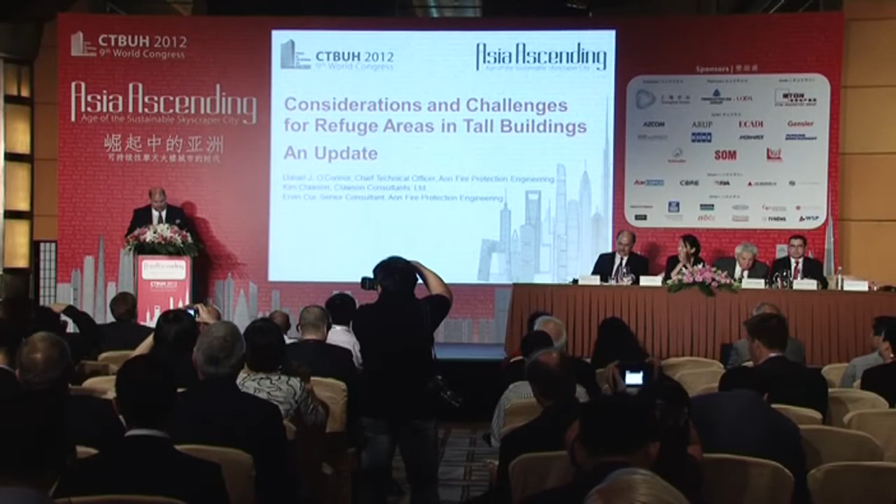I think this week, particularly the last 2 days, we heard a lot from the developers, and from finance and investors for buildings, particularly today. As I go through my presentation about refuge areas, think about the impact of refuge areas, particularly refuge floors, on the financial model for these buildings and their sustainability aspects.

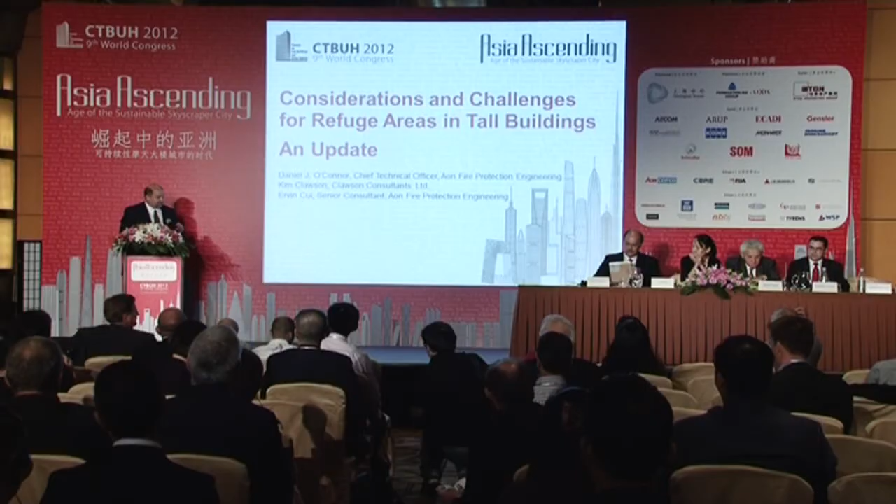What I want to talk about today is not so much my opinion, but a collective dialogue we've been having within the CTBUH Fire Safety Working Group. Just to give a little background, the Fire Safety Working Group has many very experienced engineers who have worked on tall buildings around the world in Asia, Europe, and the Middle East, participating in our working group.

One individual was particularly interested in us having more critical thinking about how we use refuge floors and refuge areas in buildings. He brought this to our working group's attention, and we started a dialogue that has continued for about the last year and a half. We've been preparing this paper. In fact, this presentation was presented at the CTBUH conference in Korea, but today is a bit of an update with a couple additional things we're going to talk about.

The important thing is we thought we needed to slow down and think more deeply about how refuge floors are used, what their value is, and what they're trying to do. So I'm here today to bring forth a lot of what our dialogue has been about, and maybe give you a better understanding of the issues, concerns, and reasons to consider or not consider implementing refuge areas, particularly refuge floors, in buildings.

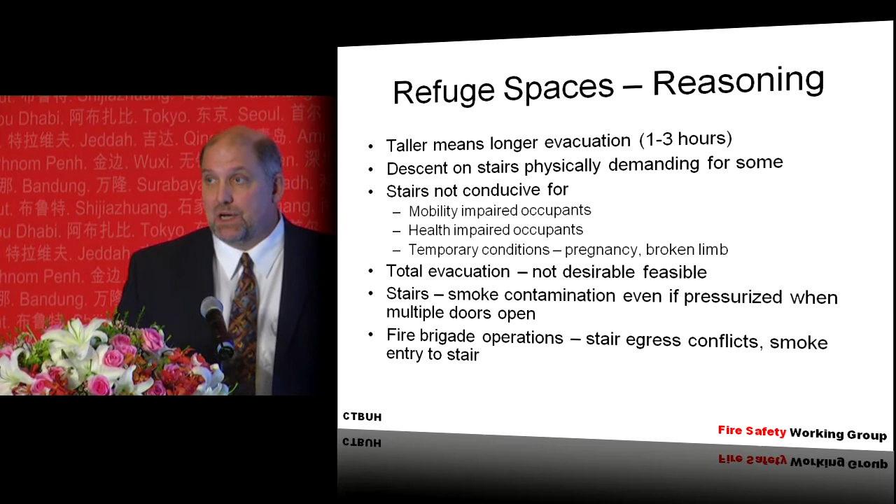Also, with super tall buildings, for a lot of standard emergency events, total evacuation is really not desirable or feasible. If you have a building with 10, 15, 20,000 people in a super tall building, is it really something you want to do—a full evacuation of that many folks? It's been done, but is it something you want to do on a regular basis? That's one reason people have suggested for having refuge spaces.

Let's talk about stairways. We know from the literature that smoke contamination can be a problem if pressurized stairways have multiple doors open. If we have a large evacuation, or for some reason many doors are open on a stairway, it's going to be difficult to maintain those evacuation routes in a smoke-free condition. Hence, maybe you want to put folks into a refuge area.

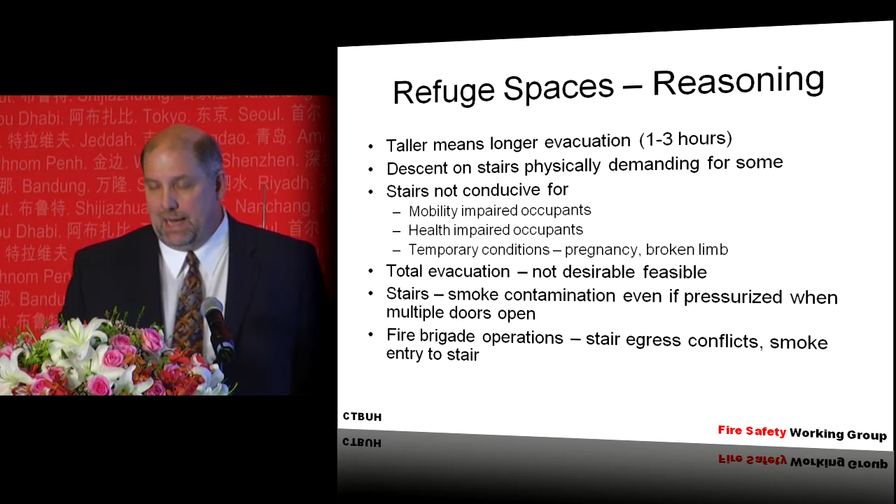And of course, there can be a reason for moving folks into a refuge floor of a building to avoid conflicts with fire brigade operations. So this is some of the background in the literature—the reasons people have decided to implement refuge areas and refuge floors in buildings.

But when we started to look at this and break it down, we saw there were really two basic methodologies of providing refuge areas in buildings, and I'm going to talk about both today. The first approach is what we call the dispersed approach.

The dispersed approach is the one used in North America—those of you who've been in North American cities, Canada—with some implementation of it in Europe and the Middle East too. The options available in the dispersed approach are that if I have a fully sprinklered building, each and every floor can be considered a refuge area. That's a fundamental tenet of the requirements for sprinklered buildings in US codes.

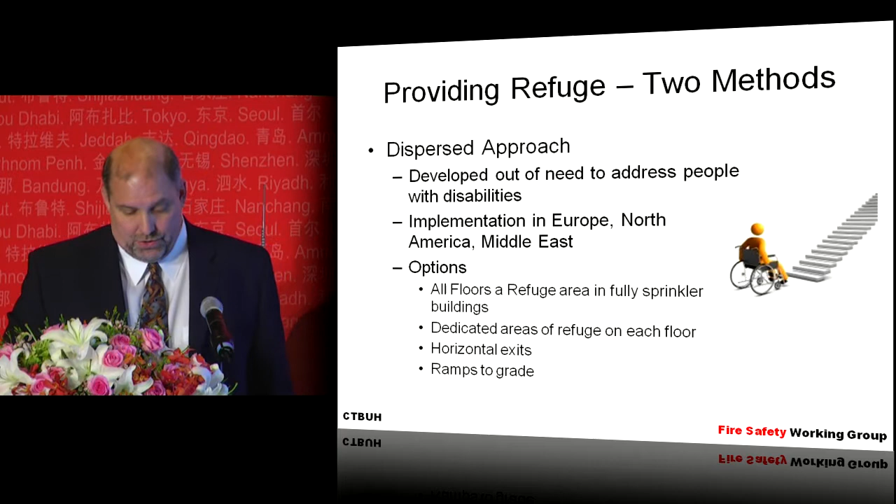There might be other ways to do this, such as creating dedicated areas of refuge on each floor in a building. For those staying in the Jinmao Tower, on the hotel floors with that beautiful atrium space, I found out speaking with people this week that the refuge areas actually use a dispersed approach, with a protected elevator lobby on each hotel floor rather than one large refuge floor. However, this building does have refuge floors too in the office areas.

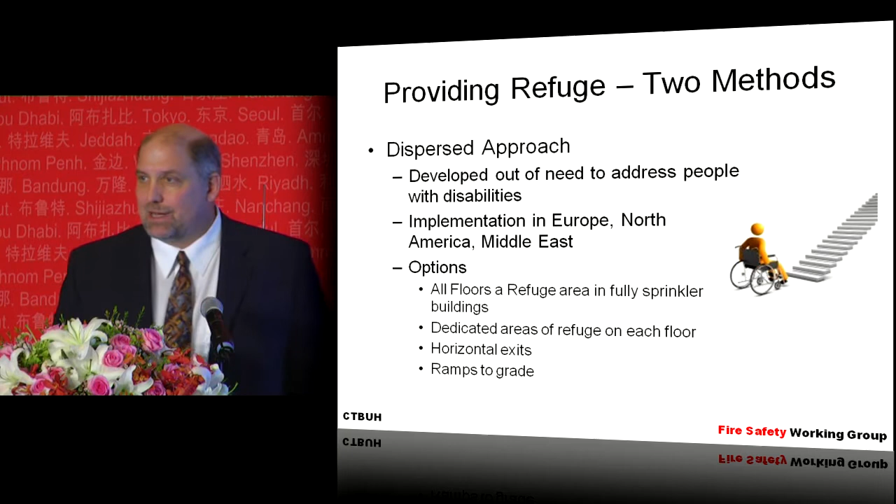Horizontal exits - I'll explain more about this concept if you're not familiar with it. And then, of course, ramps to grade. From a super tall building, we're not going to build ramps down to grade, so that's an option available for low rise buildings.

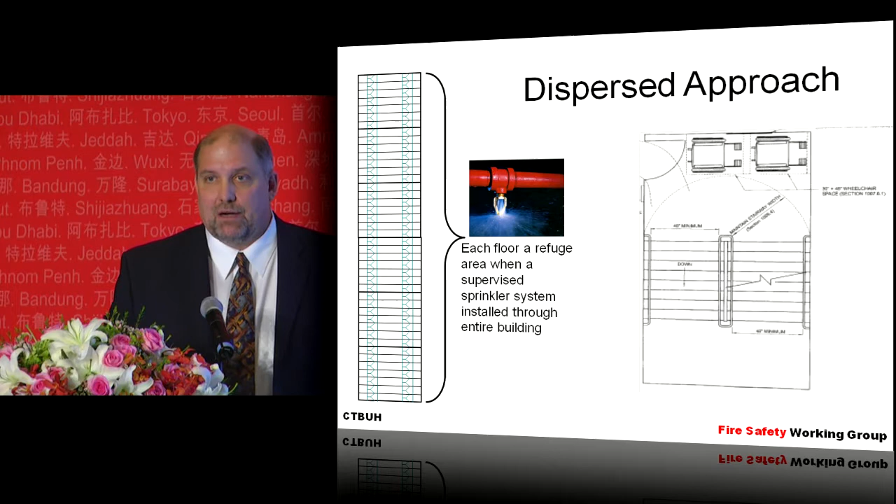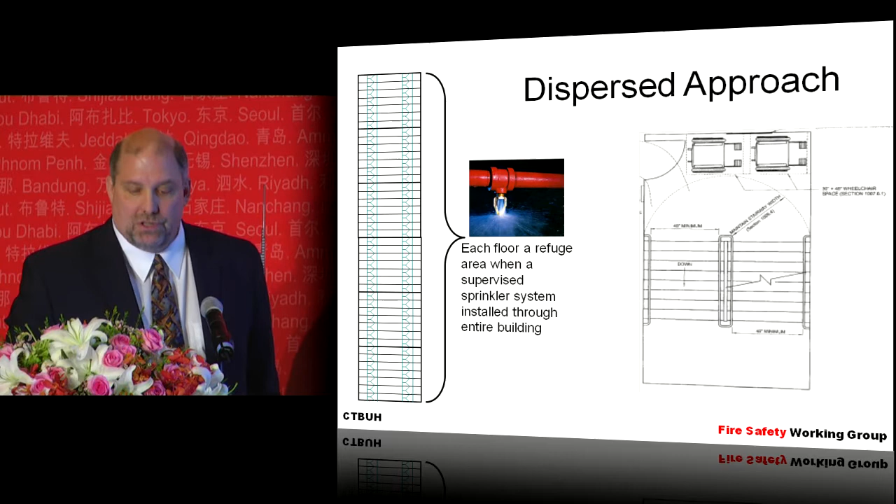But here's a fundamental look at what the dispersed approach is about, trying to graphically represent that if we have sprinkler protection to deal with the fire at the point where it occurs and put it out immediately, then we need not be so concerned about moving people to another refuge floor location. So all the floors in the building can act as a refuge floor.

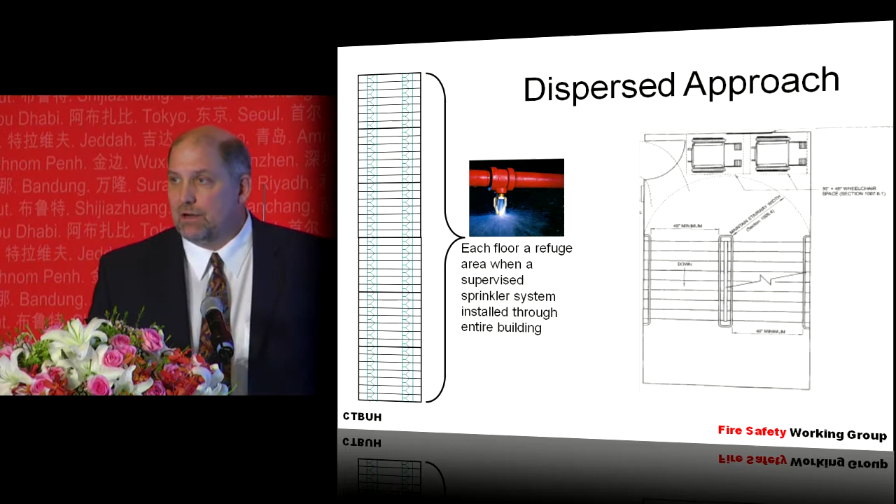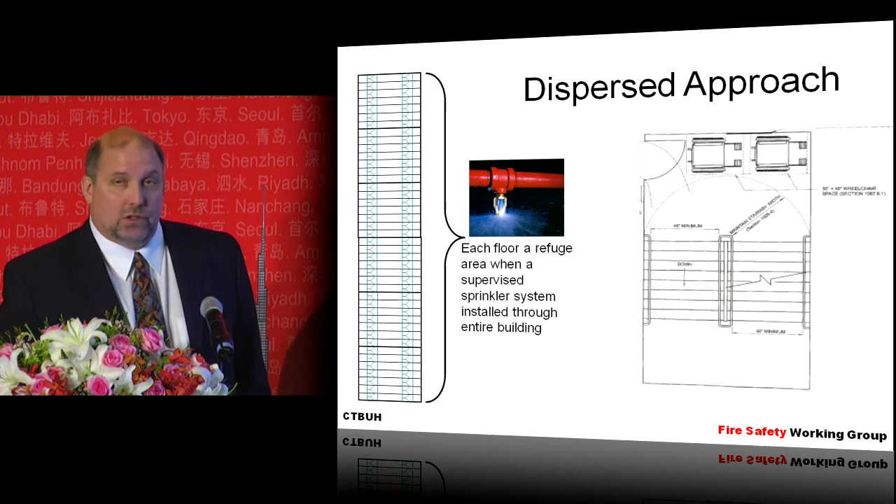We can go a little further and say, for dealing with handicapped issues, we have the potential to put wheelchair spaces in the stairways too, so that folks heading towards an exit can find refuge in the stairway, even in a sprinklered building. I'm from Chicago, and in sprinklered buildings there, every stairway is required to have at least one wheelchair space. That's the dispersed approach.

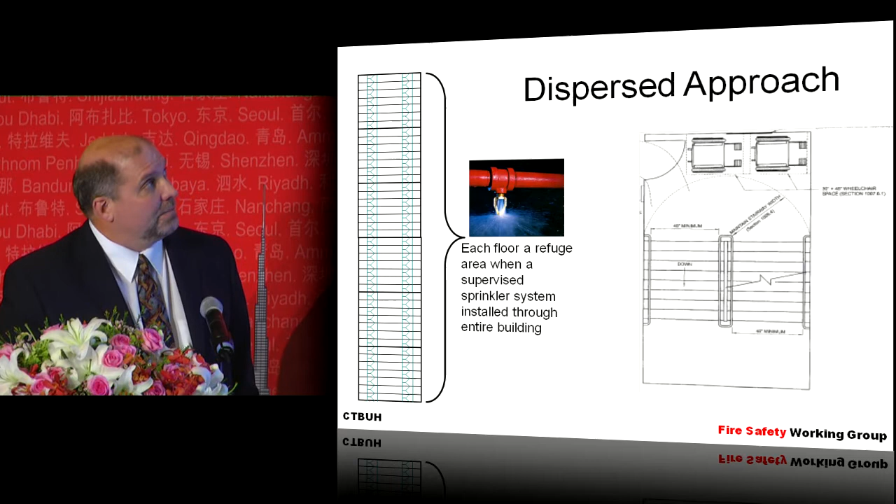Another way of providing refuge in buildings is the concept of horizontal exits. This basically says that if we provide a fire separation in the building - a rated fire separation, probably a 2-hour separation that extends from exterior wall to exterior wall - people can leave from the fire side to the non-fire side and be in an area of refuge. That's a concept quite often used in healthcare and hospital facilities.

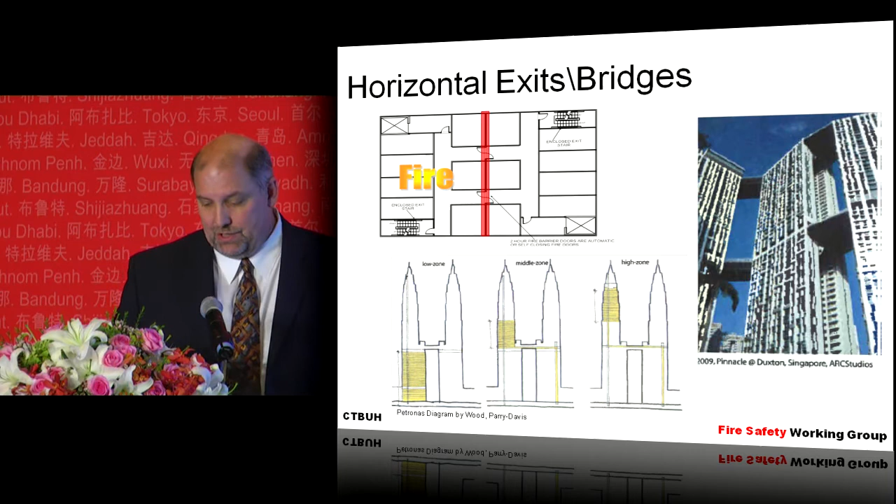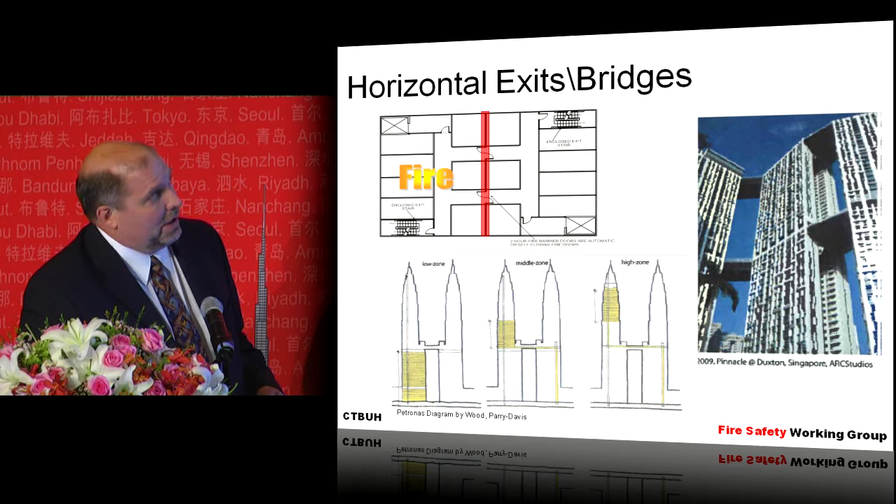But also, as Anthony Wood pointed out in his opening comments today, bridges such as those at the Petronas Towers can serve a valuable method of exiting the building - coming down, crossing over into another building that's not at risk. So bridges can be a valuable way to achieve horizontal exits, either inside a building or moving from structure to structure.

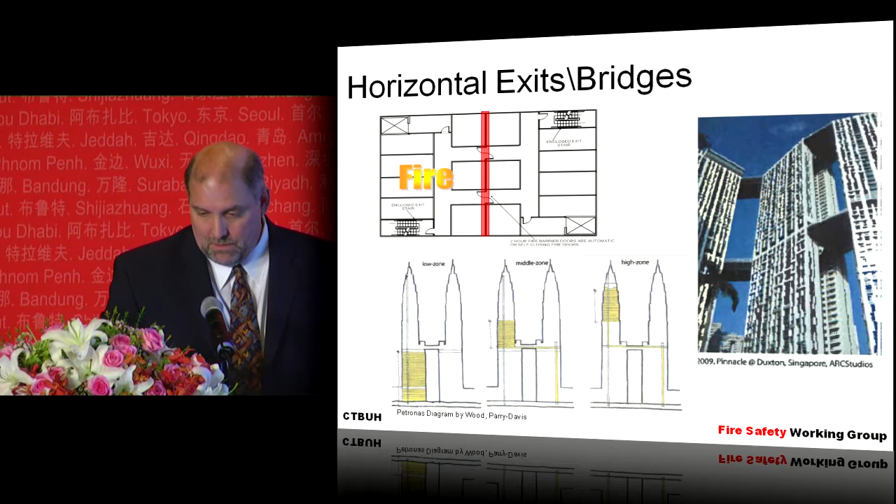Continuing our discussion about the two methods of providing refuge, the second approach is the consolidated approach, which is what we find here in Asia being used regularly. From what we can find in the literature, it seems to have been an outcome of several Asian fires in the 1990s, including Hong Kong's Garland building. If you look back at that fire, the building didn't even really qualify as a high-rise - it was only about 7 stories. The fire started in the basement, but it was a bad fire. Out of that discussion came the need and desire to create refuge floors in buildings.

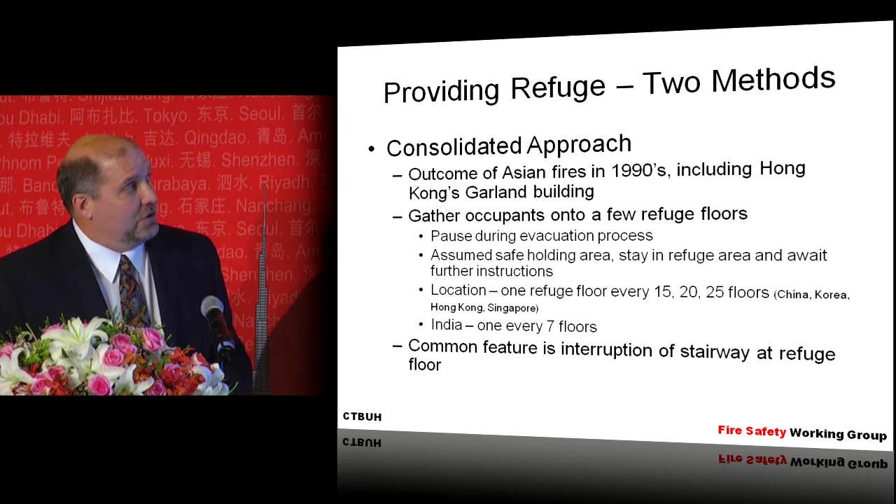So using this consolidated approach, we move people to one central floor area or one of several floors located in the building, for a couple of reasons. The literature indicates these are good places to pause during evacuation, perhaps if you're tiring from moving vertically through the building. It's also assumed these are safe holding areas where you can stay for a long period and wait for further instructions. What we see in Asia requirements is that refuge areas are required maybe every 15, 20, 25 floors - it varies, I'll talk more about that in a few slides. In India, the requirement for refuge space is one every 7 floors.

Also, one thing we see in the application of refuge floors in buildings is that a common feature is interruption of the stairway at the refuge floor. And in fact, that's a very common architectural feature that is used now.

In the Jinmao building, if you're in the hotel parts of the building, so in the upper levels, we have application of the dispersed approach, but in the office portion they actually use the consolidated approach because they have 2 or 3 levels that are refuge floors in the building. As you come down the stair, you can leave the stair and go into a corridor that then connects into a room. I was on the 15th floor, they had 2 of these rooms.

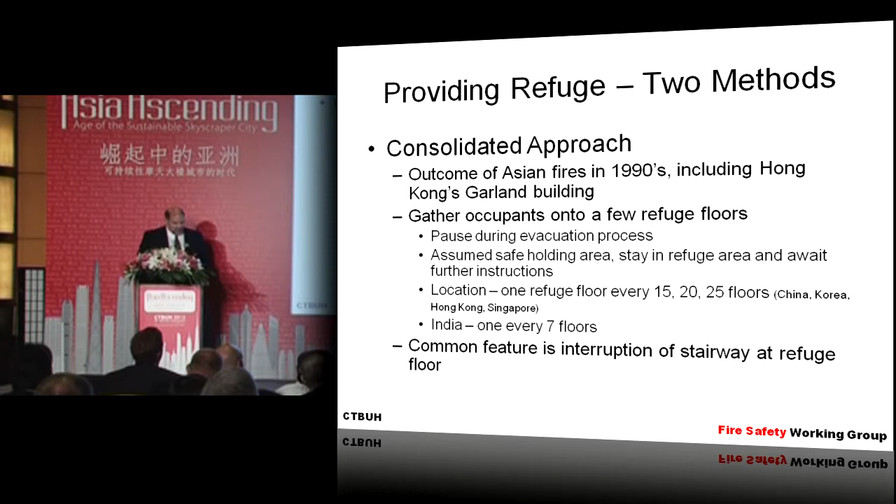So let's stop and slow down and take a look at what the refuge floor concept is about. Basically what we're saying is we're going to dedicate one floor out of our tall building to refuge for occupants. So what that allows for is that we can have this dedicated area, and we might say, let's move people down to this refuge floor.

So what we effectively do is we take an area that's empty and we move a large population of people into this floor, either to await further instructions or maybe because they decided they could go no further in the building because of the type of event that happened.

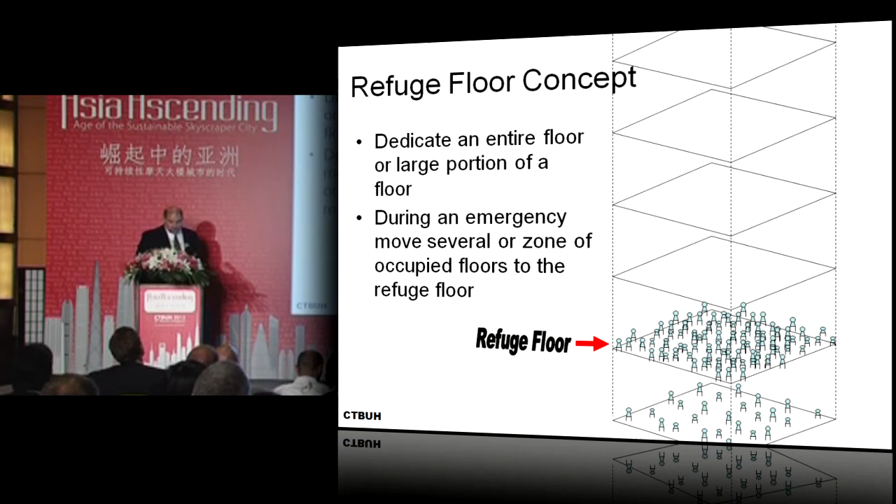So there's a number of issues when we do this. When we move all these people to a floor, there's a number of what we believe are serious design issues that include: are toilets needed? Do we need drinking water on these floors? It depends how long these people are going to be there, what the nature of the event in the building is. Do we need to provide seating facilities, or is it just going to be standing room?

Certainly, an important consideration can be, what is the emergency power for the lighting and the floor amenities provided in this refuge floor area? Also, there can be issues related to how well this floor area is protected against increasing fire spread in the building, whether that be flames or smoke.

And then once we move everybody from all these floors, who were probably on floors that had an HVAC load as would be needed for the population, now we have all this large potential population on the refuge floor. What does that HVAC design need to be to accommodate them?

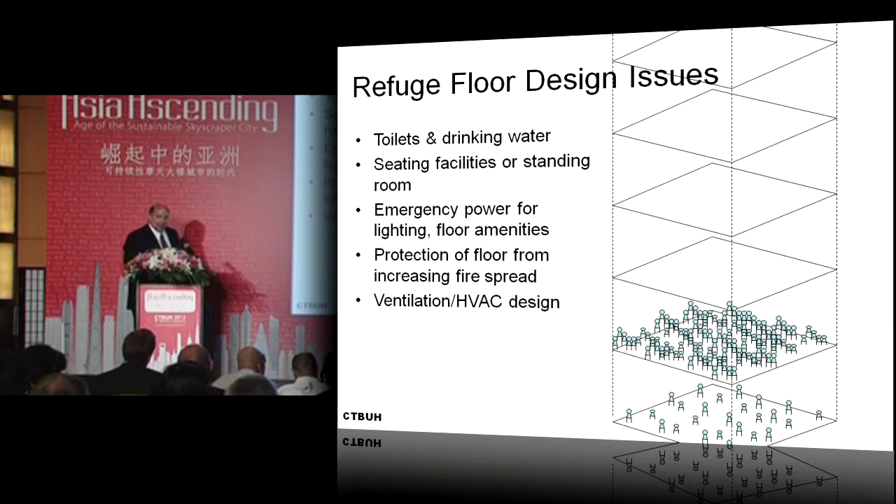Then there might be some safety issues we see related to application of refuge floors. Looking back at the literature by a number of Asian authors, we see a list here of Kwok, Cheng, and Chow and Chow, and you can find these references in our paper. They have all pointed to the fact that when refuge areas are done, and I think Hong Kong likes to use the concept of having two opposite walls open air, they pointed to the issues of potential for smoke contamination of those open air areas from fire and smoke that might be venting out the building.

Again, there's also HVAC system function considerations. Is there going to be adequate fresh air for the population there? And are we going to pressurize this area to try to keep the contaminating smoke out of this area?

One of the things I have a particular interest in is human behavior in fires. One thing I've become a little concerned about is overcrowding, the potential overcrowding issue. If we have this large crowd of people in this area, remember, this building may have been designed with only 2 or 3 stairs to serve the upper floors. Now we've created a much larger population, a factor of 4, 5, 6 normal to this floor plate area, and we still have maybe only the same number of stairs.

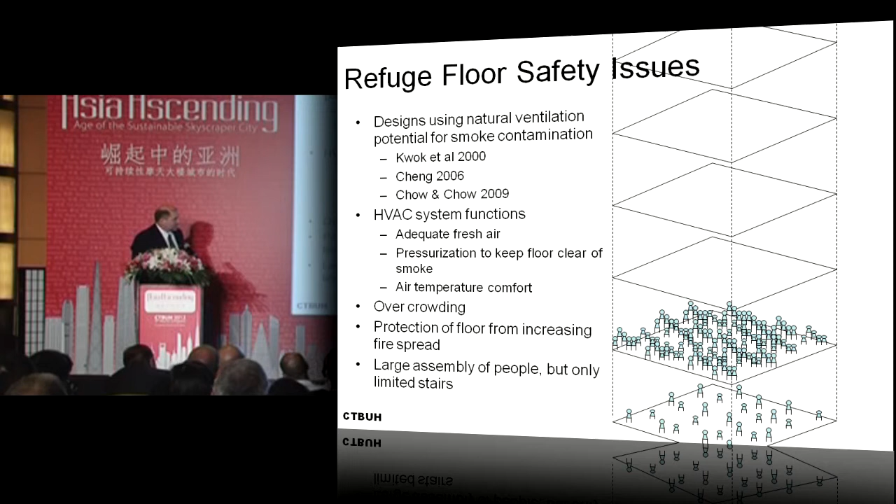I've already mentioned the issue of protection of the floor from increasing fire spread from floors below, perhaps, and we've talked about the large assembly of people.

So one of the big things we see, and again this goes back to the financial models for tall buildings, is what are the costs associated with these refuge floors. There's a number of different things that can impact the financial model for the building, including the additional construction time to add these floors, and maybe cleaning and HVAC costs for what's a normally empty space.

But then we see that there's definitely maybe a loss of efficiency and an impact on the potential leasing plan and leasing model for the building. There might be definite issues with usability when you have to interrupt a tenant who wants perhaps 4, 5, 6 floors in the building, and then you have to tell them we have to interrupt your operation with the refuge floor.

Certainly there might be property tax issues. Are these floors and zoning potential issues related to this? Are we losing zoning potential by having to add these additional floors in? And what are the property tax issues related to having an empty floor that sits there dedicated for the use of refuge? So these are questions that go to the financial model of tall buildings and also to the sustainability aspects of tall buildings.

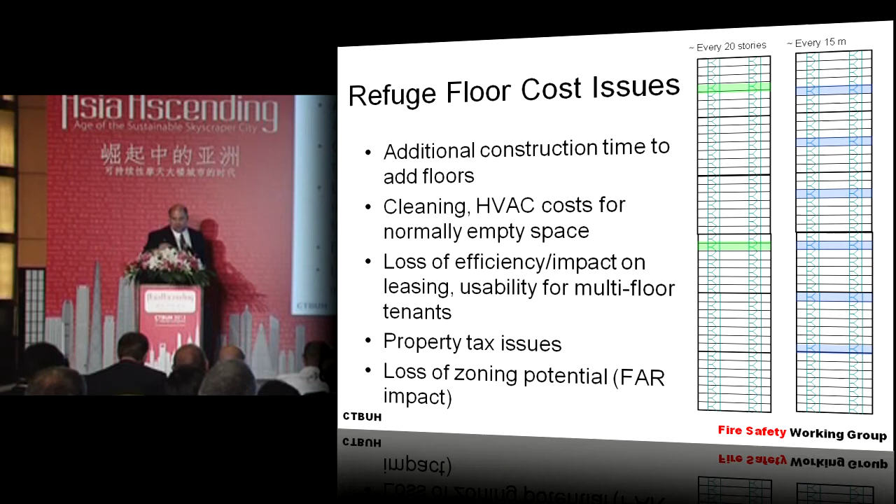You can see here, looking at a similar building, that maybe if you're providing refuge every 20 stories, you're taking up a floor here and then a floor here. But if you go as in India, which requires every 15 meters, then you would have refuge areas in this fashion. In either case, you might be taking quite a bit of real estate up, and a loss of revenue.

So one of the things I wanted to point out today is that there are a number of different evacuation scenarios. You can take any given tall building and probably develop a dozen different evacuation scenarios. But what I wanted to show you here today is just, for example, to try to understand what some of the issues might be with refuge floors.

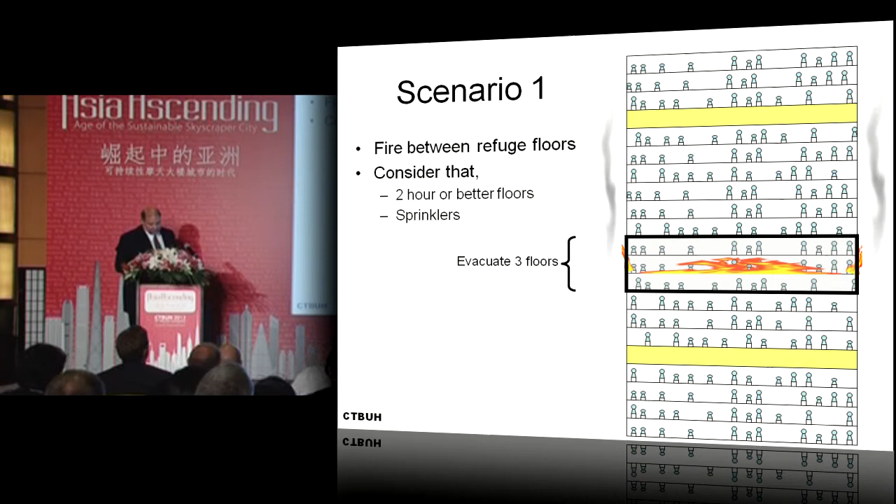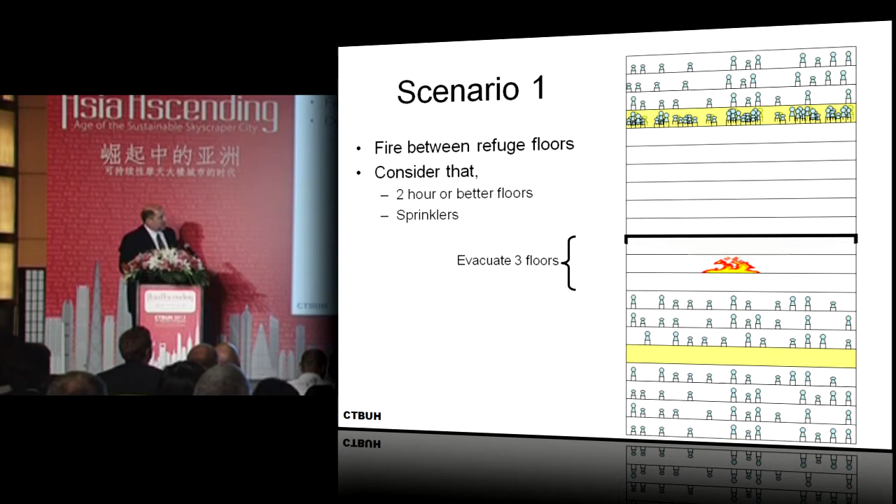So we have a fire that occurs in one area of the floor. The typical response might be to order an evacuation of the floor above, the floor below, and the fire floor, and let those people evacuate through the stairs out of the building while everybody else remains in the building, or do we? Maybe this fire continues to grow in size, and perhaps then there's a need to move people into a refuge floor.

Now if we really think about what we do to design our tall buildings, we're typically going to have 2-hour or better fire-resistant floors. We're going to spend a lot of time and money to fire stop any of the mechanicals and protect the vertical shafts that go through these floors. And we're going to have sprinklers in this building too.

So is it even really necessary, if we've moved the people out of the immediate zone here, and with the 2-hour floors, the fire stopping, and the sprinklers in place, is it even necessary to move these people up to a refuge floor? Perhaps not. I would suggest to you that those folks could have stayed in place on their floors where they were. So that's one scenario.

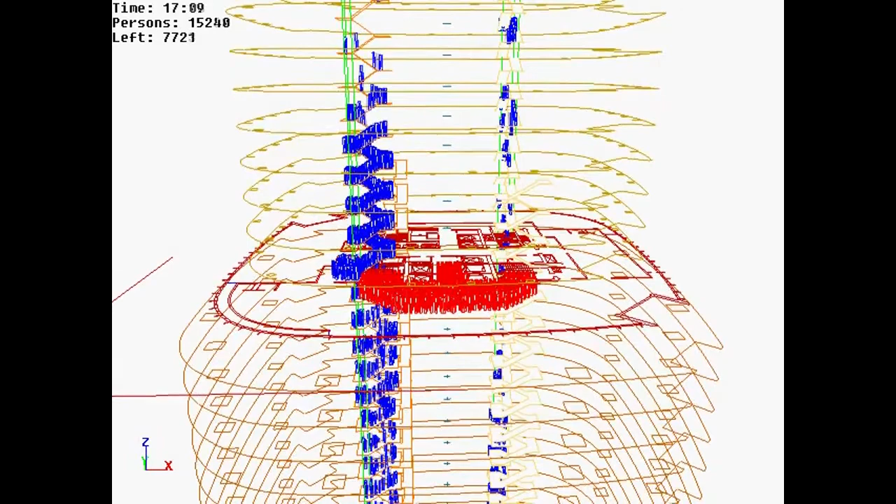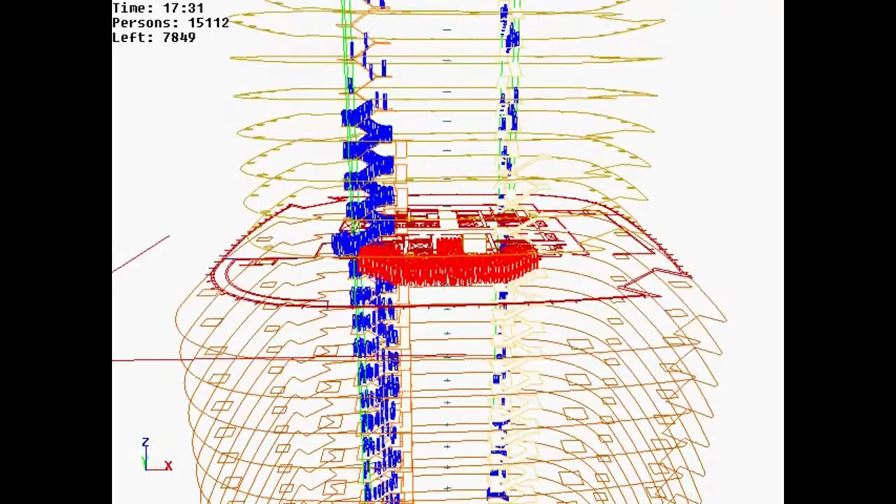So what this shows you here is an issue that we see could be problematic. This is an evacuation model where people are filtering down the stairs and coming into a large refuge area floor, and they're trying to use the elevators on this floor. People come out of the stair, they come into the refuge area, and then they go back into the stair. You can see a potential crowding condition here, with elevators rising up and down at times, but potential crowding conditions can develop as people wait for the elevator here.

We don't really know a lot about how people might use these floors, so this is just one illustration of what could happen. Will this happen in this manner? I can't say that it will, but it's something we see in the models that can be an issue depending on how the floors are arranged, how they're being used, and what their purpose is.

Maybe it would have been better to not have a refuge floor here and let everybody stay in the protected stairway and continue to exit through the building, or maybe stay on the floor where they were.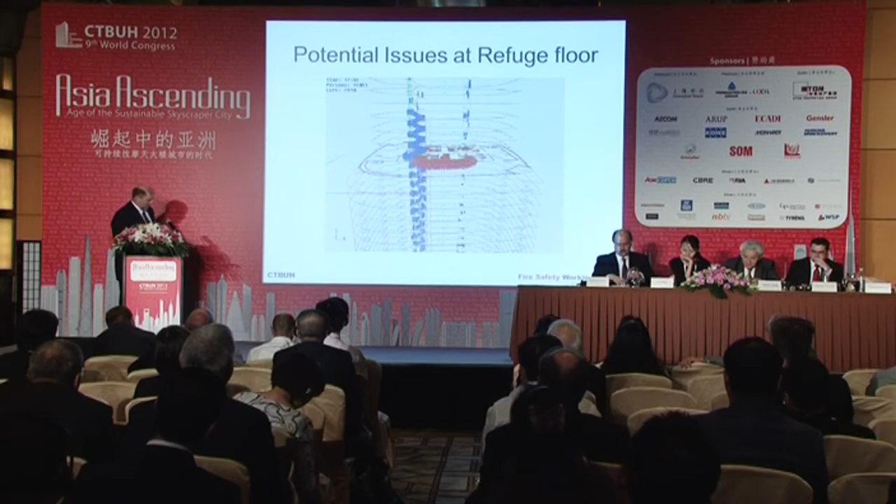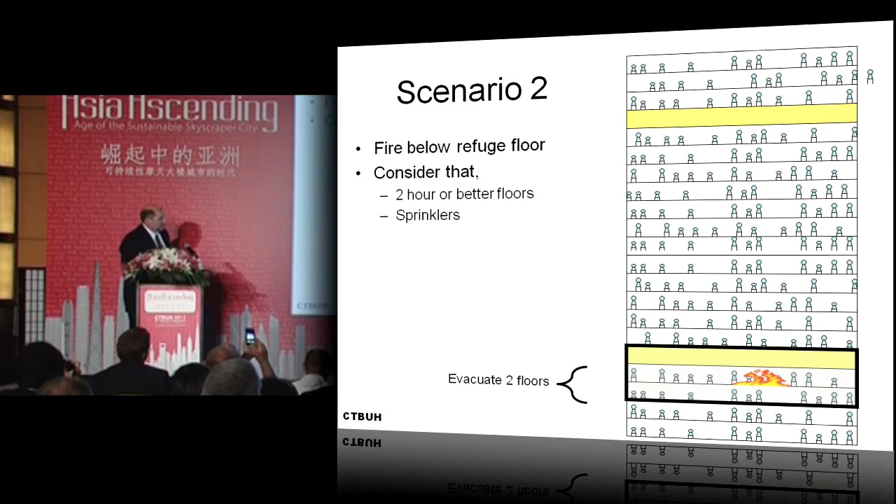Here's a second scenario. This is where we have a fire located on the floor immediately below a refuge floor in the building. In this case, we would say let's evacuate two floors because our refuge floor is empty already.

But a concern I have is how are all these people being trained and thinking in the evacuation process? What do they need to do and what are they being told to do? Are they being told, we have an emergency event, please go to the refuge floor?

After we evacuate the two near floors and we have our zone, is it really fair to say let's move you down right into the refuge floor, even though it is supposedly a protected space? Do we need to move those folks in the refuge floor right above the fire? My suggestion would be that it would have been better to have just left this population on the floors where they were in the building.

So the question is, how are you using these refuge floors? What are people's perceptions about these refuge floors? How will they really use them? My understanding from talking to a number of people here in a number of buildings in Asia is that people kind of ignore the refuge floors and don't really use them. That is feedback I am getting from people on our fire safety working group.

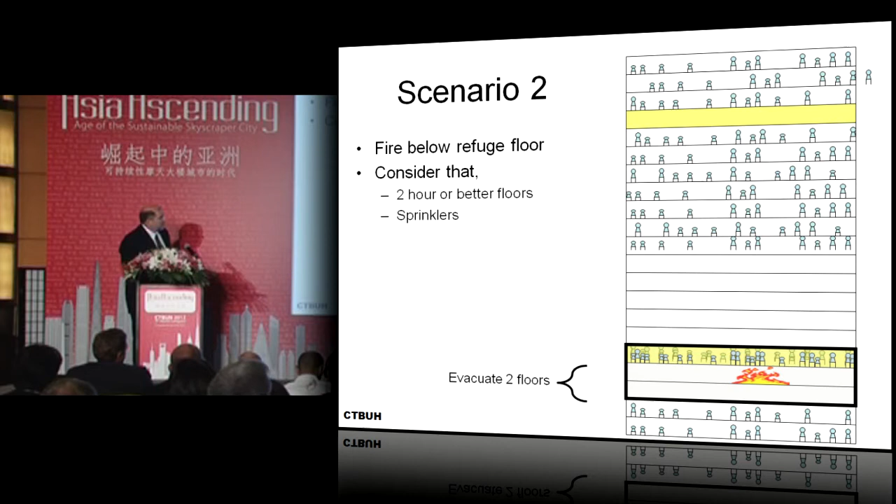One of the things I mentioned earlier was the various codes. We see there's a wide variation among the various codes we're looking at, and we have collected the requirements from codes in a number of various countries. Here's just, for example, a listing of a few.

In Korea, when are the refuge floors required? Refuge floors are required when you hit 50 floors. In Hong Kong, their rules say 25 stories in height. In Saudi Arabia, 30 stories. And in India, it starts when the building hits 24 meters in height. So that's when they're required.

Then there's issues related to differences in implementation. There's a lot of variations we see in Asia with how much floor area you really have to use and make available in this refuge floor concept. In Hong Kong, we see that they like to have 50% of the total gross floor area. In Korea, they like to get you as near as possible to 100% of the floor area, although they do have room allowance for mechanical areas.

In India, they use a different approach of calculating, either having 15 square meters of area on every floor or calculating it based on population. And in Saudi Arabia, we see that they like to have dedicated floor areas, the entire floor, every 20 floors in the building.

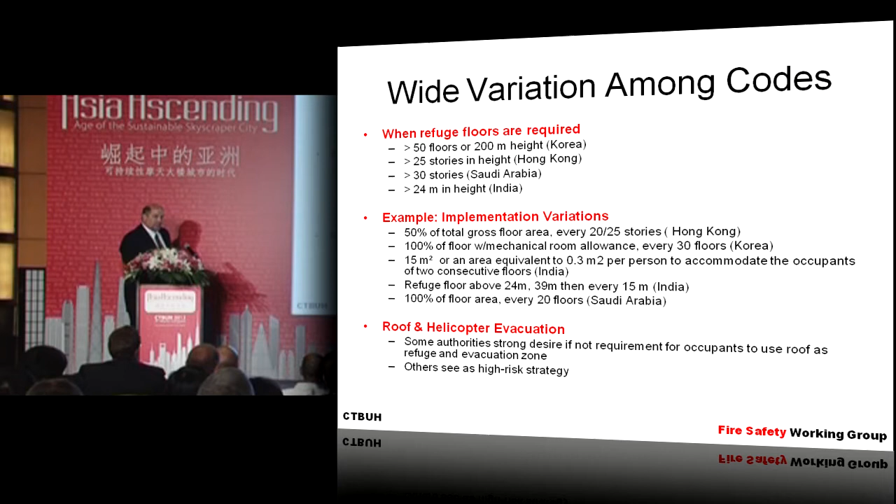So what else do we want to talk about? Roofs too. I think Feng mentioned earlier about helicopter landing in the Chinese requirements, but we know that some people like to look at the roofs as refuge areas too, and some authorities have a strong desire, if not requirements, to see the roof being used in an evacuation zone. However, others see this as a very high-risk strategy. So let's take a look at a little example here.

Here we are in Shanghai back in November of 2010. This was a 28-story apartment building. Of course, there were a number of things that were factors in this fire. There was exterior scaffolding and welding, and also contributing factors from polyurethane foam and exterior wall construction. But this fire was a serious fire that resulted in 58 deaths.

But if you looked at Wikipedia trying to find some reference here, we saw that the roof was not a good place to want to move people to. If you look at the pictures here, they did try to implement helicopters to assist in this, but as the reports indicate, the helicopters were prevented by thick smoke from really approaching this building.

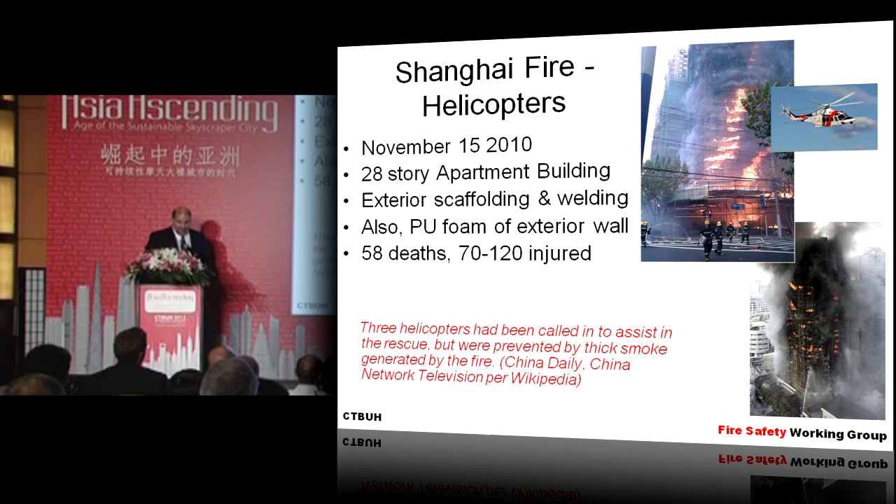So again, this is a situation where helicopters may not be good. And what we see when we look at rooftop refuge and helicopters too, I think we have to take into consideration the issues of flight safety. We have the issues of the impact of weather on flight on any given day that there might be an incident, but we also, as we can see from the Shanghai fire, the issues of turbulence and operating a helicopter in the zone of a large fire.

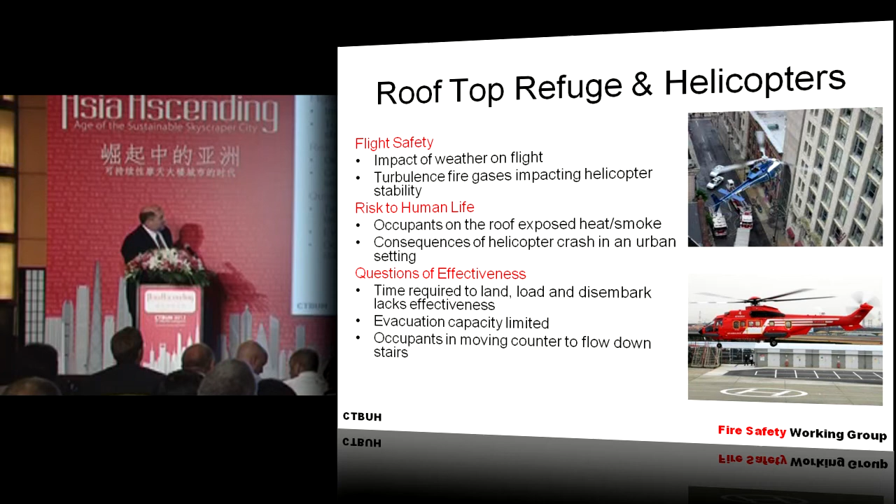Helicopter flight operations are very tricky, risky operations. Certainly occupants on the roof, we don't want to put them there and expose them to undue heat and smoke, but this is equally important. Do we want to really take on the risk and potential consequences of a helicopter crash in an urban setting?

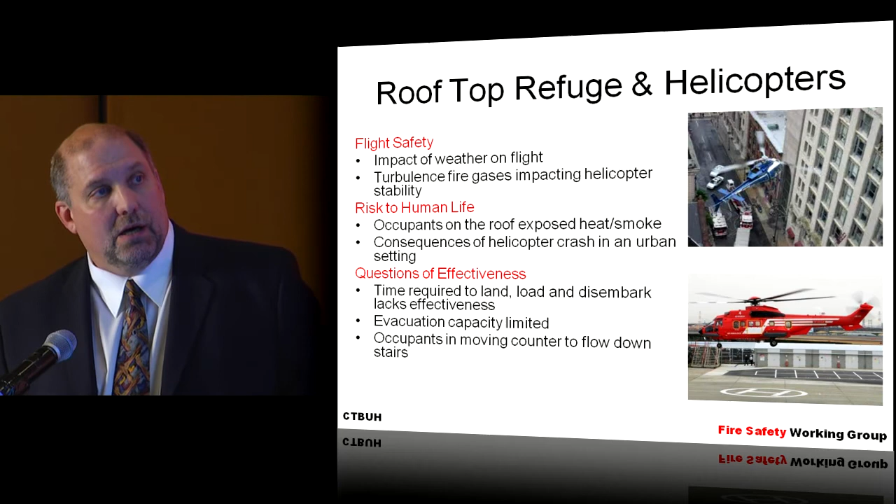Other concerns our group has about helicopters: what's the time really required to land a helicopter, load, disembark, take these people, and get back to the roof? It's really not an efficient way to evacuate people, particularly large groups.

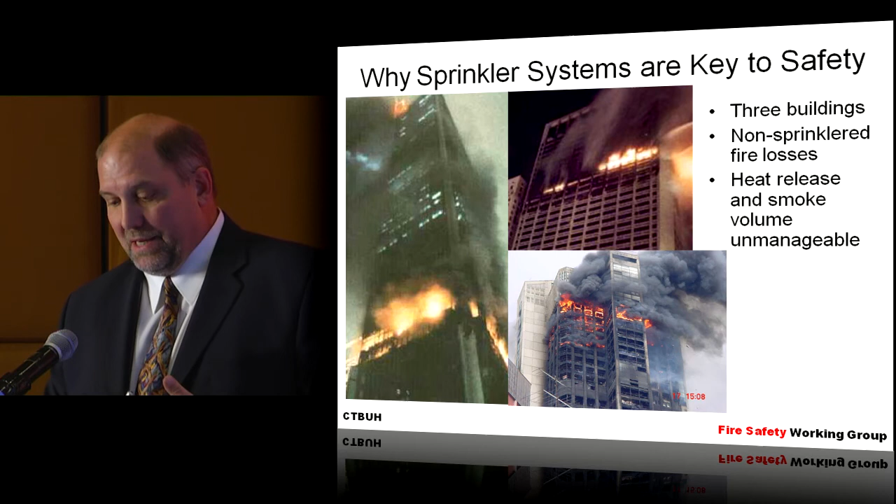So the point I like to make here is that we need to pay very, very particular attention to the sprinkler systems we put in our buildings, and maintain and test them on a regular basis to ensure that they are as reliable as they can be.

So with that, what are we doing? Our CTBUH working group is moving to create a document that talks about all these issues. Some of the conclusions we are coming to are the fact that we think if you have a fully sprinklered building, most if not all floors can serve as refuge space.

Also, if you're going to institute refuge floors in buildings, can't we, in terms of the financial model and sustainability of tall buildings, have some kind of use for those spaces rather than them sitting there as empty shells? Certainly buildings with bridges and horizontal connections reduce our reliance on refuge floors in buildings.

But rather than taking up real estate in tall buildings, what we think is more important is to take the cost savings from not putting refuge floors in buildings and focus on sprinkler system reliability, testing, and maintenance. Put your money to that, because if the sprinkler can be like the on-demand firefighter there to take care of that fire and put it out, we will not run into these type of issues. And then, of course, there's property tax and zoning issues.

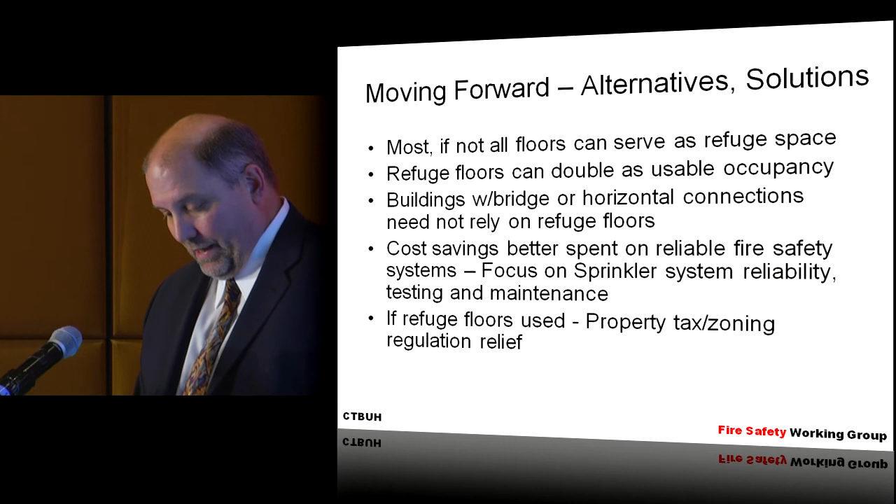One of the final thoughts I wanted to leave you with today is something I came across this week. One of my colleagues explained that in Shanghai, there are at least 1,000 buildings over 100 meters tall. So I did a little math, assuming each of those 1,000 buildings averaged 40 stories, that would be 40,000 stories. And if I provided refuge floors every 20 floors, that would be 2,000 refuge floors.

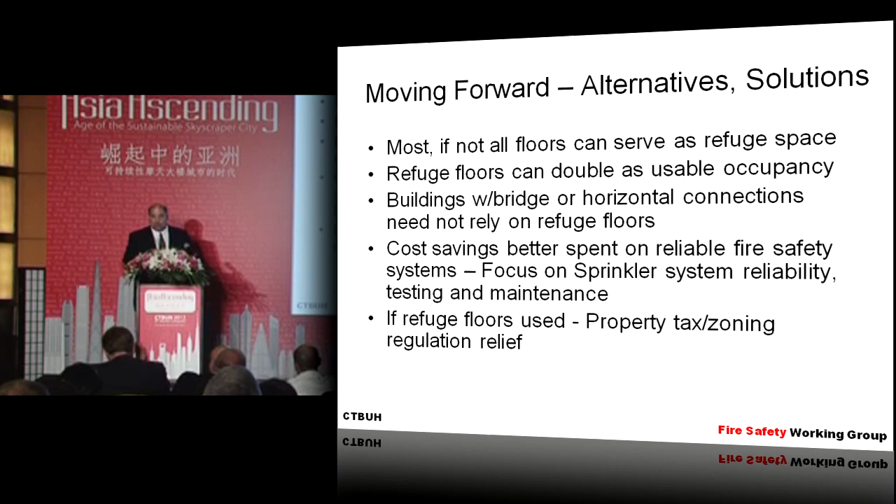Now, this building, the Jinmao building we're in, is 88 stories tall. So if you do the math, what I concluded is that if we hadn't built all those refuge floors, we could actually build 22 more Jinmao towers. So think about that from the standpoint of cost, financial viability of tall buildings, and sustainability of tall buildings. And that's it. Thank you very much.